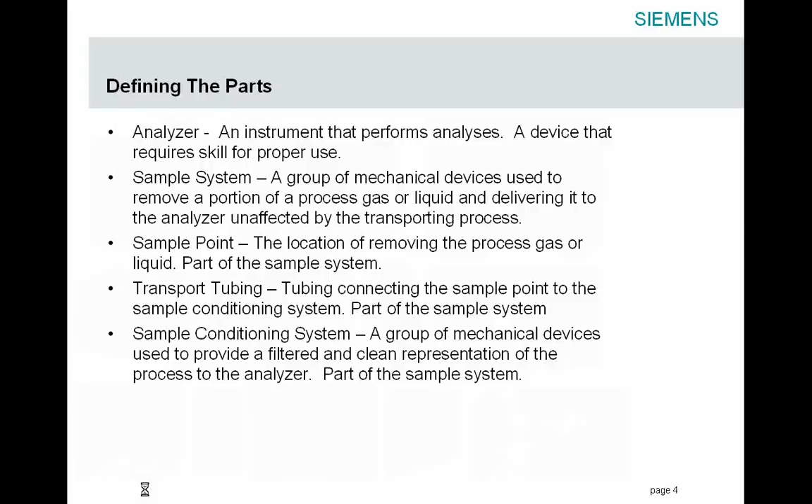So the point of this is that the sample system is not necessarily a very complex and ominous device. It could be as simple as a filter, or it could be placed in a cabinet. It's just a whole group of things that can go into an analyzer system.

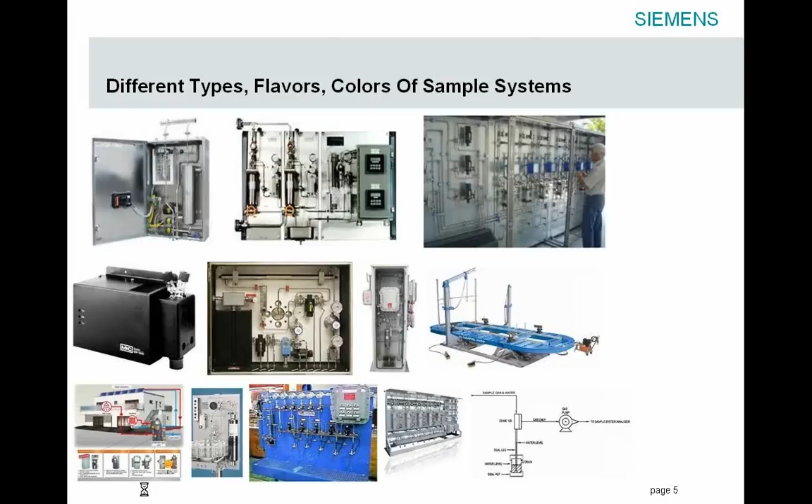So the question becomes, you want an analyzer. The understanding of analysis needs to be defined. You have to understand the reasons to install an analyzer. What is the reason? Is it safety related? Is it process control? Is it simply for information? Is it regulatory? Or is it just because somebody wants to put an analytical device on a stream and see what happens? Defining the reason is very, very important.

And around that reason, there's criteria that really should be investigated and explored. And it's best to put those reasons down on paper.

As far as installing the analyzer, how much money is in the budget? Is cheaper better? Not necessarily. Chances are, if the cheap route is chosen, usually the system will work somewhat, and that's a definite maybe. Chances are there's going to be a considerable amount of money wasted not only purchasing the machine, but the total install cost, meaning the operation cost after the machine is installed.

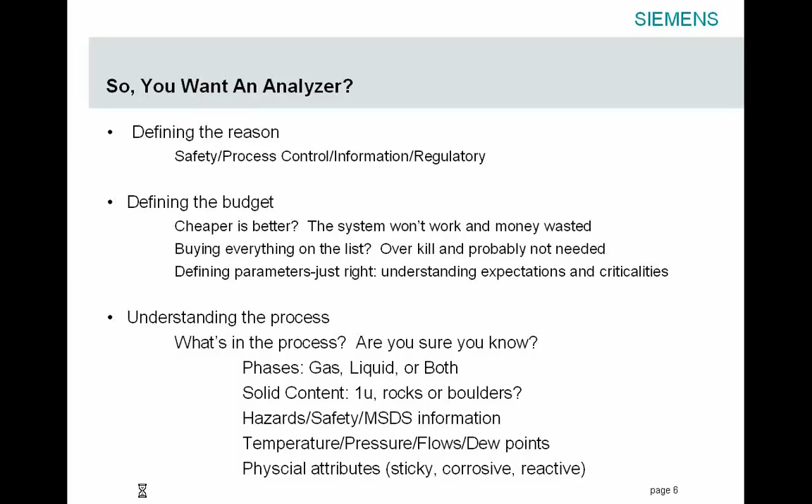The second part of understanding the need for an analyzer is defining the expectations. What do you want it to do? How's the data read? Is the data stored? Is it used? How is it used? The online time of the analyzer.

How long can a person go or the system go when the analyzer's down? What happens during maintenance? What happens, say in the case of environmental analysis, where if an extended downtime is incurred, are there any fines? How much does it cost to actually run the analyzer? What's the maintenance time? The list goes on and on about the total installed cost and defining those expectations.

Another critical part is defining and thoroughly understanding where to take the sample for analysis. You want to take it on the suction of a pump, as an example. Do you want to take it on the discharge of a pump? What's the flow rates? What's the pressures? Are specifications exceeded for the analyzer and so forth?

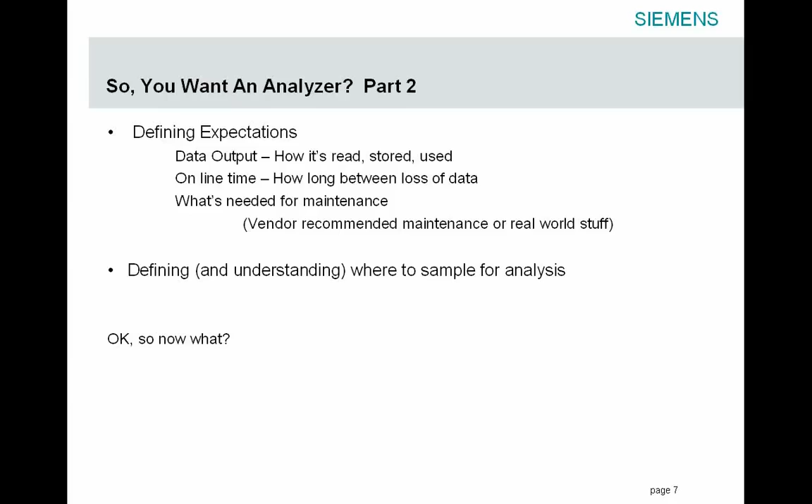So once you define all those things, okay, now what? Where do you go? You've got the list of expectations, the definitions, the process on paper. So where to go next? What comes first, the sample system or the analyzer? I call this the chicken or the egg syndrome. What comes first, the chicken or the egg? Do you want to say, okay, I need XYZ analyzer, or I want to measure a certain process?

Unfortunately, the answer is not very simple. It's very complex. Typically, when a person or a company goes to specify an analyzer, it's understood that you want an analyzer, but you usually don't know what or where you want to put it. Defining all those things helps identify the type of analyzer, the detector, the technology of the machine, the reasons, the budgets, the criticality, and expectations typically will help make those choices.

The components of analysis can really narrow down your choices for your analyzer very, very quickly. The different types of detectors will usually steer a person in the right direction, or steer a specialist like myself in the choice of analyzers.

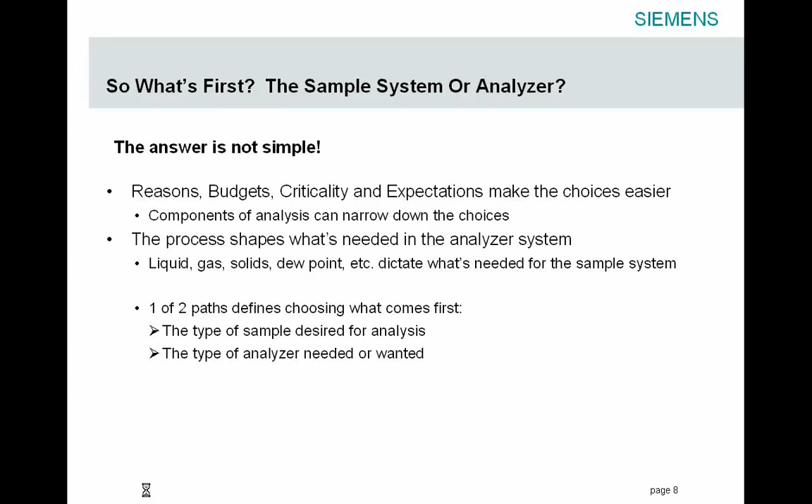If those on the call are familiar with the fire triad, where heat, fuel, and oxygen come together to make a fire, I've come up with a triad for an analyzer system. The analyzer success, or the installation success of the analyzer system, is typically a 3-point triad. There are 3 things that are absolutely necessary to have a successful installation, and without those 3 things, usually the costs go up and the success is not as great as it should be.

The first thing is the sample system. Understanding what is necessary for the sample system correctly, identifying all the parts, understanding dew points, pressures, and so forth, is absolutely critical.

The second thing is the process. Understanding the process is the second critical part, and that process has to do with the actual chemical compounds in a pipe or in the process of the customer's system, whether it be a refinery, a digester, or any type of process that the customer wants to monitor. That process has to do with the actual facility, the manufacturing facility, all the way through the analyzer's output. So the entire process covers the analyzer system, transport tubing, and the actual chemical makeup of the system itself.

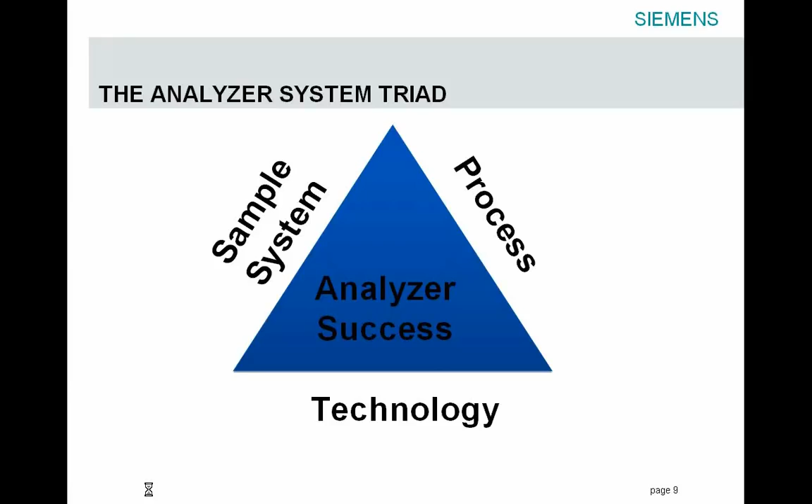Moving on to the individual parts, the sample system is where most of the problems usually occur. More than 80% of the problems in an analyzer system usually is pointed toward the sample system for some reason.

Having said that, the sample system's job is to provide the process and the actual gas or liquid or whatever you want to measure to the analyzer. It must be compatible. The sample system should not be reactive. It's got to be very timely, providing an acceptable delay from real time. It's got to be representative - it can't change the original sample.

For instance, if you're measuring water analysis and you want to measure the pH, the sample system should not change the pH of the water. You can't have something adding, say, an acid or a caustic to the water. If those components are somewhat reactive and change the sample itself, it will not be representative.

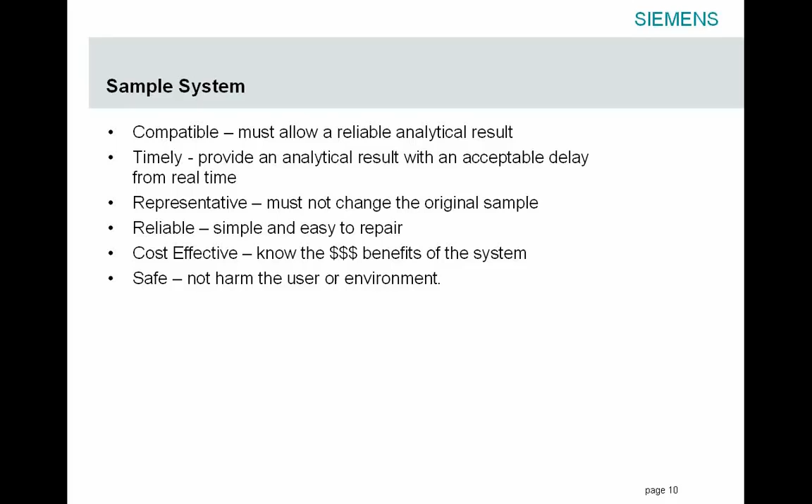Understanding the details of the entire process is critical. It is also critical to know the delay time from the very point of the sample entering into the sample transport tubing to the measuring output of the analyzer. What is that delay time? This has a lot to do with the sample system itself and the time delay that I mentioned before - it has to be timely.

Knowing where to take the sample point has to be calculated into the overall analysis. As an example, if there's a large tower with a pipe coming into the bottom and going out the top, and let's just say this tower is 20 feet in diameter and 100 feet tall, the residence time inside that tower is very long. So taking a sample on the side of the tower is not very advantageous.

True, you're taking the sample of the tower and getting what is thought to be a timely sample, but the residence time inside the tower is a factor of the analysis. The best place to take that sample would be either on the inlet or the outlet, depending upon what's going into the tower. That way you get a better understanding of what the tower is actually doing, either before the process makes changes on the inlet, or on the top after the reaction takes place.

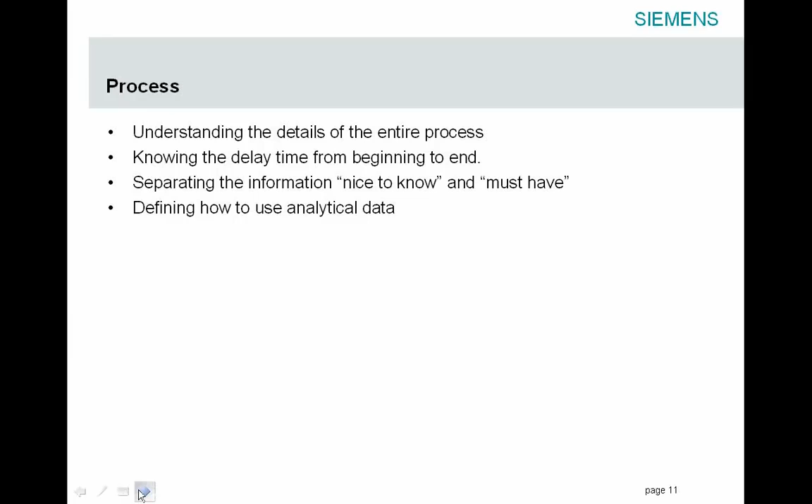Knowing the technology and the types of detectors and what their limitations are is a very large part of how the analyzer goes in. What is the best method for reading that particular component? Would it be an infrared detector, a flame ionization detector, a thermistor type detector, gas chromatograph, lasers, or zirc oxide? All those things are critical into understanding the technology of the heart of the analyzer.

In the extended course, I talk a lot about the nice-to-know stuff and the must-have stuff and the technology and how the two compare. Understanding the technology really limits or narrows down the type of analyzer that can be installed in the system. Defining the use of data can provide hints of the type of technology that's going to be used.

If you need something very fast, a response on the order of a second or less, then laser technology is usually the best choice. If you can withstand minutes of delay, typically you want a traditional extractive system where you can condition and withdraw the sample.

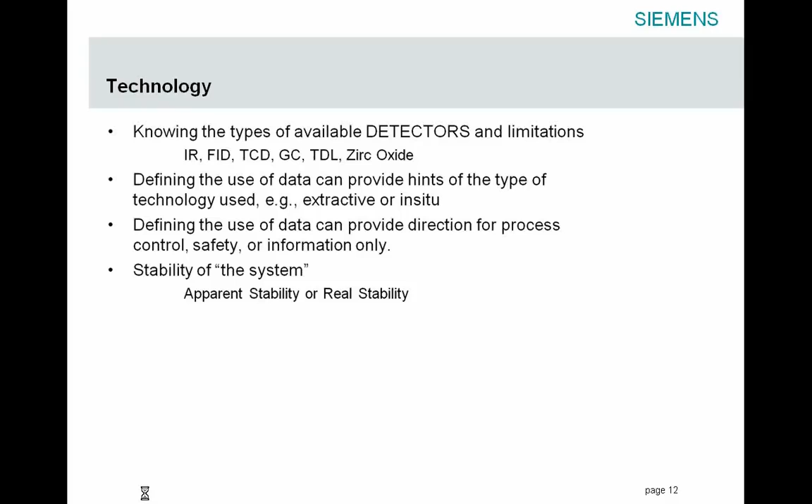Understanding the reasons for analysis. What comes first, the analyzer or the sample system? We've been talking a good bit about that.

Understanding the phases, solid content, hazards and safety issues, the physical attributes, the solubility, the dew points, all that goes into what's understanding in the process.

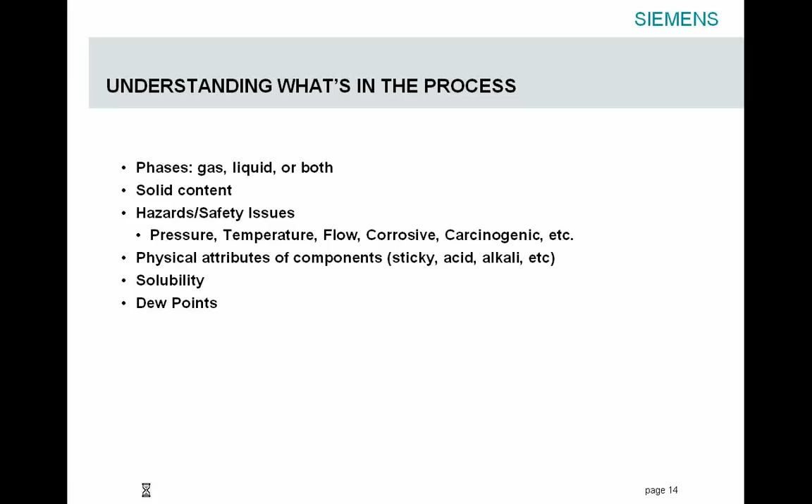The type of analysis that's needed. Is it regulatory? Is it safety? Is it advanced computer control, or is it manual adjustments? Is it information only? Understanding the cost savings for the analysis.

That usually drives the project. Understanding how much that analyzer system will make for the company or the customer or wherever it's going to be placed is the key. For example, in an advanced process control system, if a process, by controlling a certain variable or certain component, say by 5%, will provide, say, $100,000 in savings for the process, $100,000 per month.

Versus information only. What drives the information only and making the cost benefits for the analyzer itself? Sure, it's nice to have, but how much is that actually going to make for the process savings?

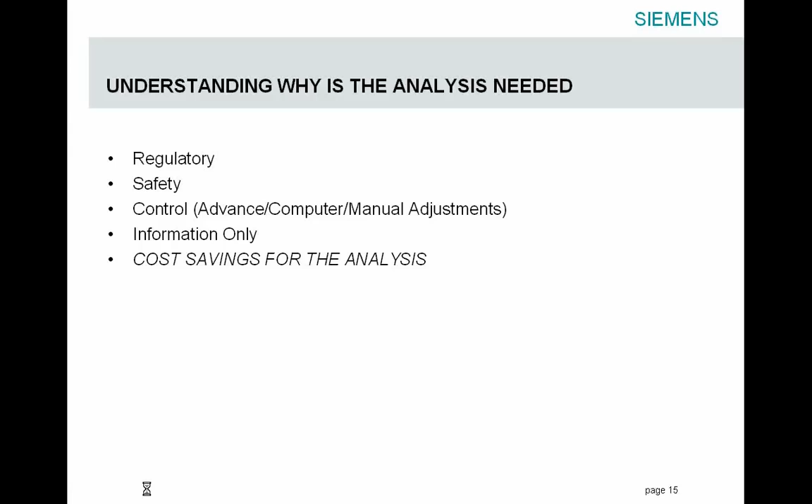The analyzer system has got to be compatible. The compatible system will not harm the analyzer nor prevent it from producing a reliable analytical result. And these are some questions that need to be asked.

Is the analyzer system compatible with the process? Have all the operating process conditions been explored? What's the minimum? What's the maximum? What's stagnant? What about an upset condition?

If it's a gas system, will liquid be put to the analyzer? What safeguards are put into the analyzer system to prevent liquid actually getting to a gas analyzer and destroying it, or vice versa? What about solid content? Anything that is reactive in the process, and so forth.

What are the operating anomalies that may harm the system? Talking a little bit about upset conditions. What about changing process? Like, for instance, if it's a chemical process, is there a changing of the desired component that you're trying to analyze, is that going on in the sample system while you're trying to measure it?

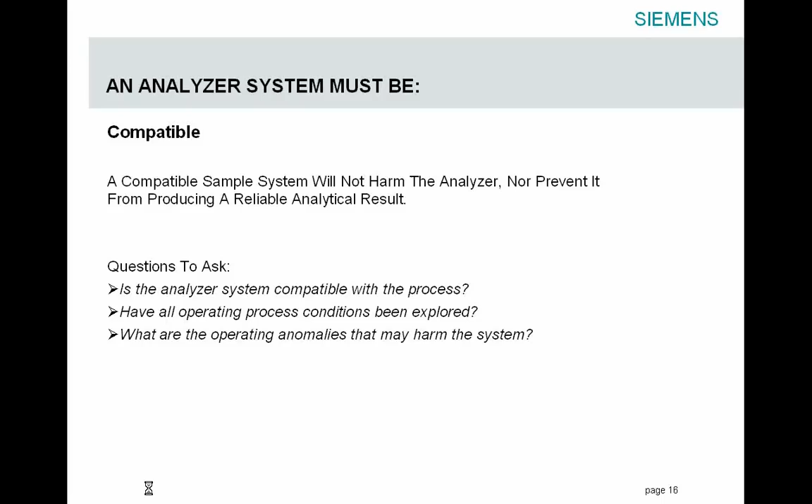Timely. Talked a little bit about delay time. The delay is calculated from the very tip of where the sample goes into the transport tubing to when the analyzer reports its result. Some delay is inevitable, and it's all additive, but the system should be engineered to minimize that delay. The question's asked: what are the time requirements of the analysis? What are the time delays? And again, all delays are additive. What is acceptable?

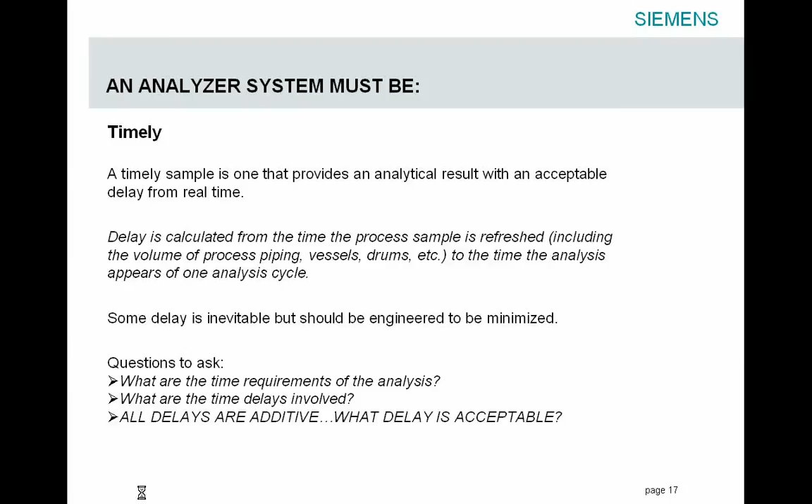Has to be representative. It's got to be accurate. It's got to provide a meaningful analytical result for the intended purpose. These are the questions. What is a useful result? What are the requirements of the results? Is it regulatory? Is it safety driven? Is it information only, process control, and so forth?

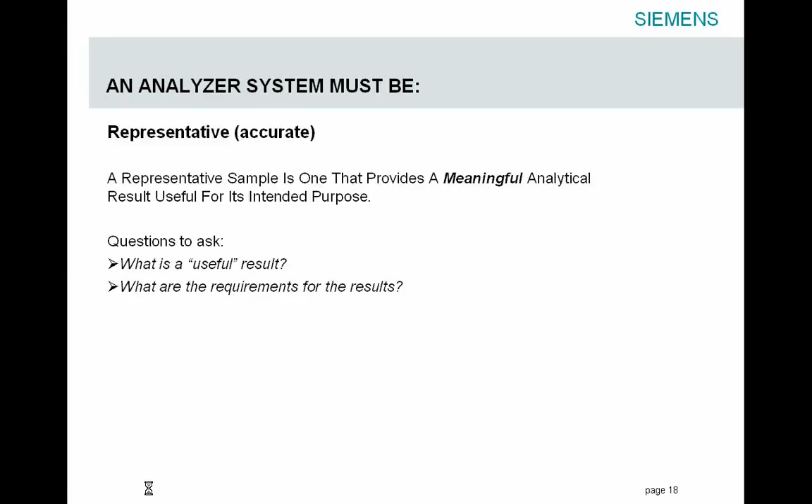An analyzer system has to be reliable. Keeping it simple is usually the best way to go. It's got to be easy to repair. For instance, if you put an analyzer system in a Hoffman box, can you get at all the parts? Do you have to dismantle everything to get to the parts?

One of the things I do is repair my own cars. Many of the popular cars nowadays makes it so difficult to do something as simple as change the oil or change the spark plugs. You got to dismantle half the motor just to get to the parts. It's very aggravating. So in the consideration of an analyzer system, those are some of the things to look for.

One of the most important things about the reliability of the sample system and the analyzer system: do the operators believe it? Can it be trusted? Is it the right analysis? It's very, very important.

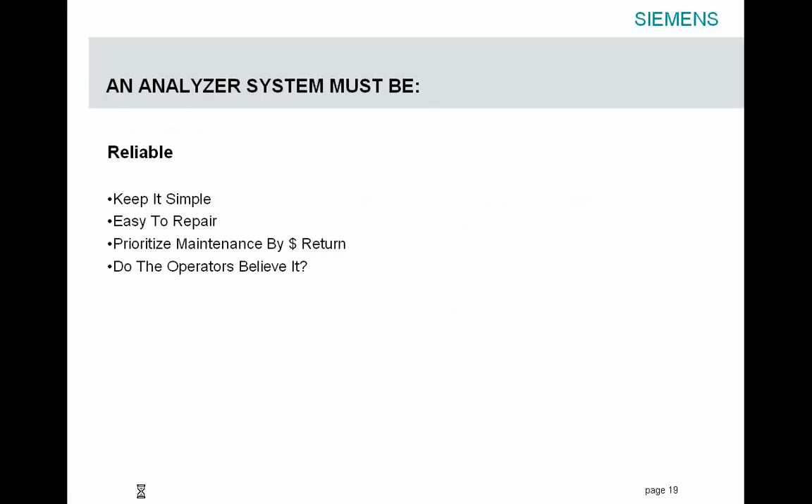Lost opportunities point towards the people that have to work on the system. If they have to work on the system all the time, what are they not doing while they're working on the analyzer? So if the system is not put in correctly, as in, say, the dew points aren't identified prior to installation and liquid gets in the analyzer, that causes a lot of maintenance issues. The maintenance people work on the analyzers, and then what are they not doing while they're working on the analyzer. Those are lost opportunities. Those things need to be identified as well. And of course, the process downtime.

The cost effectiveness comes down to really one question: what is the most simple, easy to maintain, and cost-effective design that will provide an analysis that operators will believe? Understanding all the above and the cost involved in installing the analyzer is critical to understand how much will that analyzer actually cost for total installation.

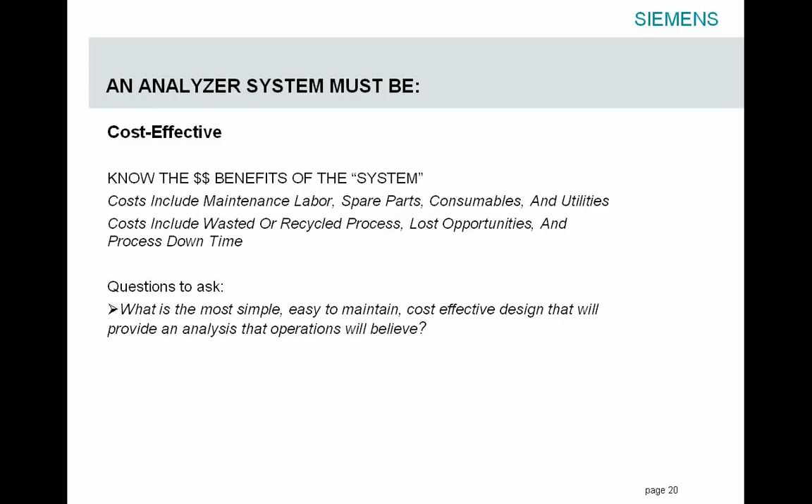Safe. It's got to be safe. All plant safety procedures apply, then some. What I mean by plant, it's either refinery, chemical plant, wastewater treatment plant, engineering company, lab, whatever. All those safety procedures need to be followed. And the question that needs to be asked is: is every component in the system safe?

One of the things that is often overlooked is the pressure of the sample being placed on the analyzer itself. What safeguards are there to prevent overpressuring of the analyzer? Do you have safety reliefs? Do you have pressure relief devices? Do you have rupture discs? And the list goes on to make sure that you have a safe system.

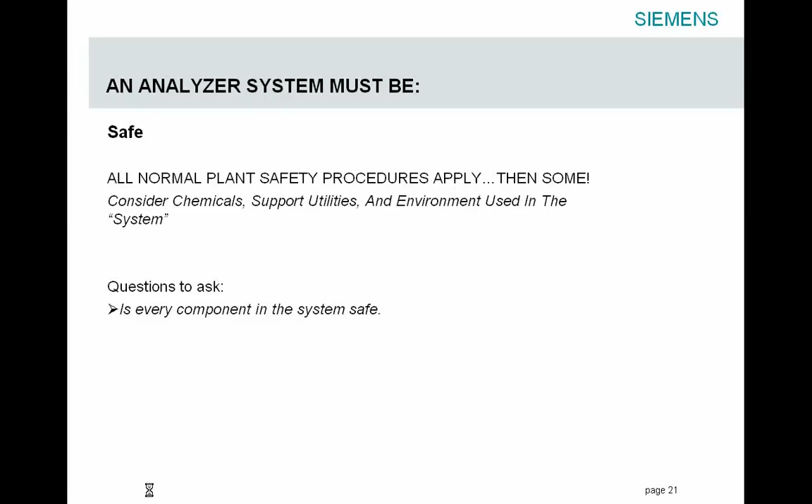Of course, getting the right answer is most important. The focus of an analyzer system should be compatible sample, making sure it's timely, representative, and keeping everybody safe. Just making sure you get the right answer.

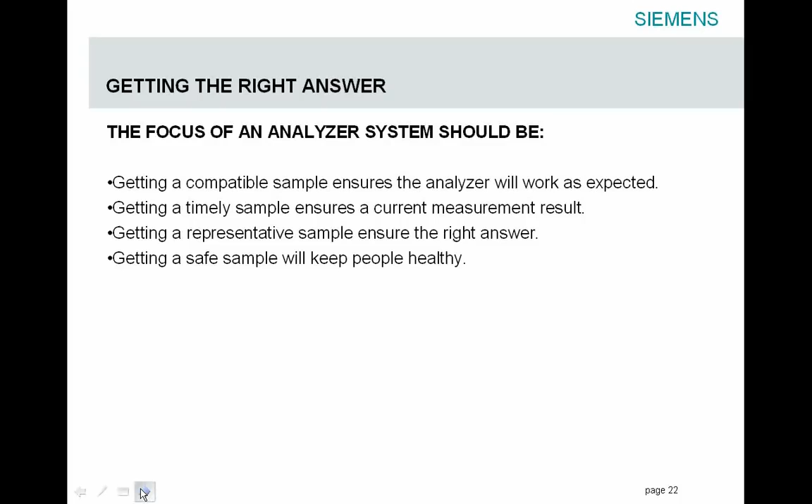And of course, be aware of the dreaded composition change. Haven't talked about this very much, but the composition change has to do with changing of a gas at standard operating temperature and pressure, where it's at equilibrium. If you change those pressures or temperatures or whatnot, the composition of the gas will change. Either it will get drier, or conversely, it will form a liquid, and that is one of the worst things that can happen to an analyzer system, where you get water in a gas analyzer. It totally destroys the machine.

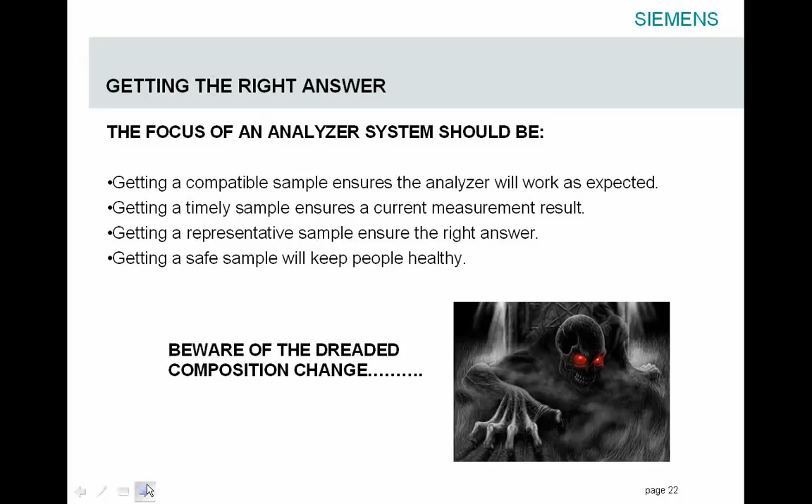That concludes the Analyzers 101 in getting the right analyzer into the system. Those are the general questions. Again, each one of those topics is explored in quite a bit of detail, and then some, in the advanced course. I'll be more than happy to schedule that and explore the opportunity to provide a better understanding of analyzers as well as the technology. I would like to thank RACO and all the folks at RACO for helping put this on. And if anybody has any questions, I will take those now.